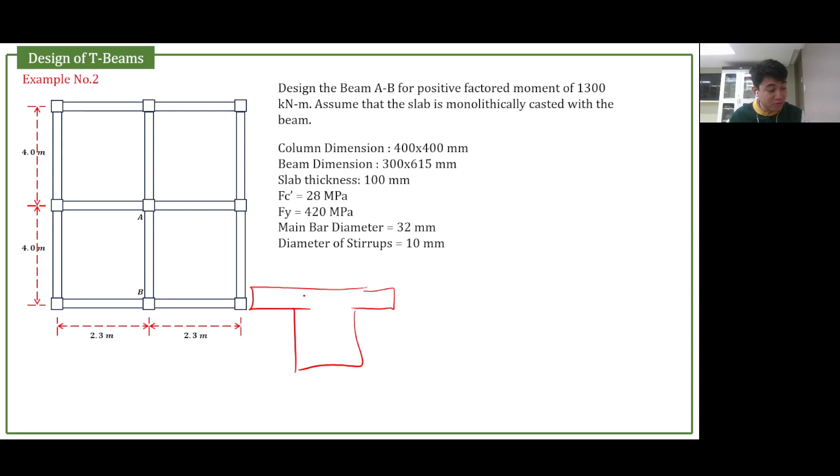So for this example, we have to design beam AB for positive moment. For positive bending moment, we have to account for the effect of the flange, because for negative moment, the tension is at the top part. So the tension, for negative moment, is at the top portion, and therefore this area will be neglected. So no need to design it as a T-beam.

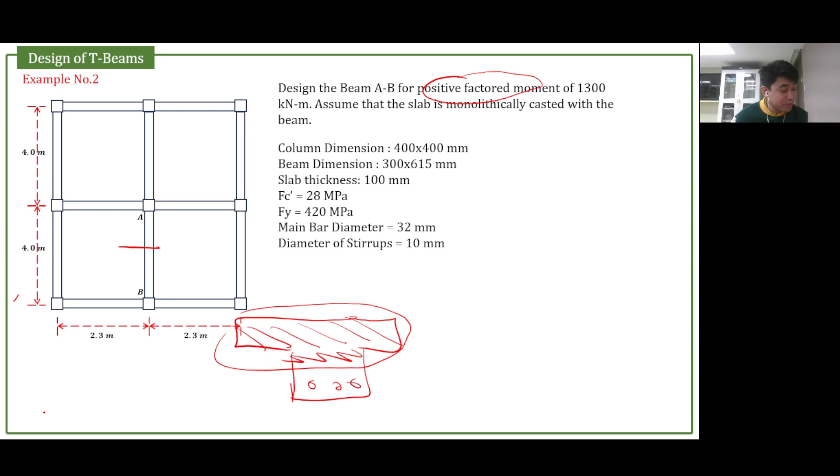Okay, so we have to complete that later, the base flange. For now, let's analyze what are the necessary parts of this beam.

The column dimension is given as 400 millimeters by 400 millimeters. The beam dimension is also given as 300 by 615 millimeters. The slab thickness is 100 millimeters, and Fc prime, Fy, the main bar, and the stirrup are also given.

The distances given are center to center of the columns, and the beams are aligned on the center line of the columns also. Okay, so let's solve.

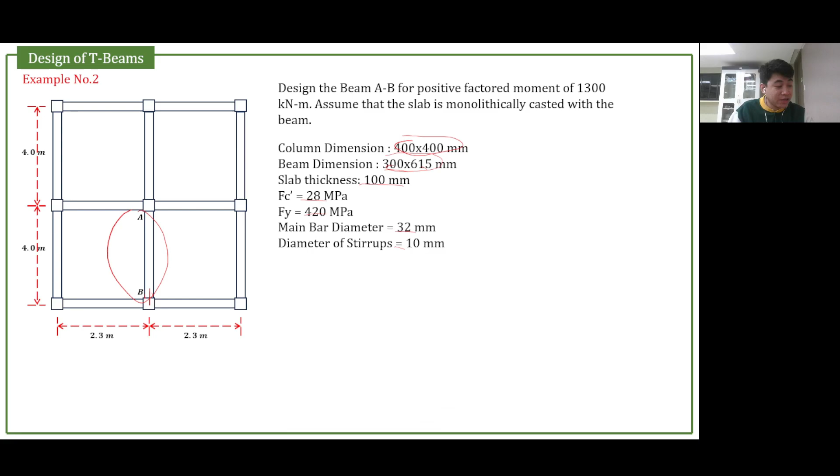So we are going to design for 1,300 kilonewton-meter of moment. First, we have to solve the base flange, and to solve it, we need the dimension of our beam here.

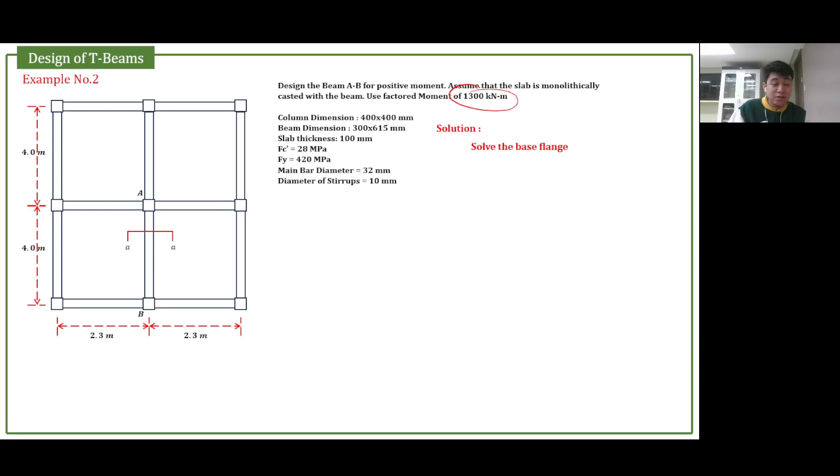So let's start by analyzing positive bending. Of course, the steel bars are at the bottom, and the compression is at the top part. Now the thickness of the slab is given as 100 millimeters.

The base beam web width is 300. And the effective depth is not yet the dimension of the beam, which is 615.

Now to get the effective depth, given the stirrup diameter and the main bar, the concrete cover is not given. If the concrete cover is not given, use 40 millimeters. So to compute the effective depth, we have 615 minus concrete cover, minus stirrup, minus half the diameter of the bar, which is 16. So we have 549.

So we have the effective depth.

Next, the base flange - how do we calculate it? We need the setup. This is the center. We have an interior beam, so this will be our equations.

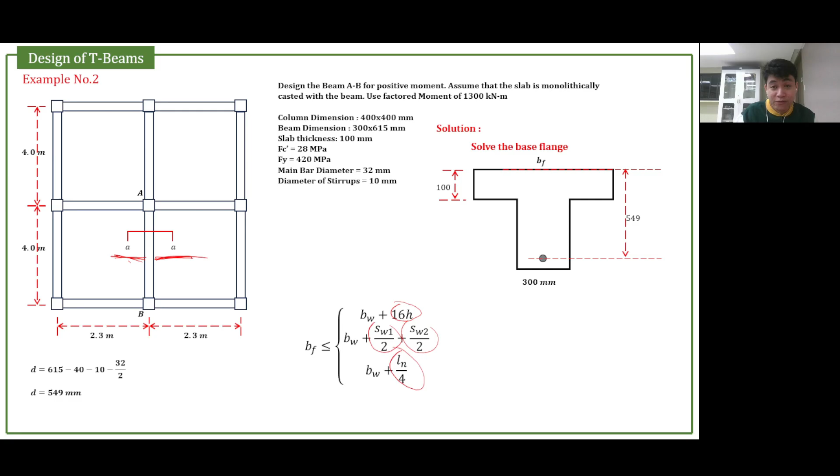So to get the base flange at each side of the web - each side, not just one side, we have two sides here. We have 16H, because it's 8H plus 8H. Then SW and SW, that's the other side. We have ln over 4, because it's ln over 8 plus ln over 8. So this is the provision we used, for each side of the web.

Going back, now let's calculate the important values such as the SW, and of course we have the thickness of the slab.

We have BW plus 16 times the thickness of the slab, that's 1,900. How about SW?

SW plus SW is the clear spacing of the beam. Since we are designing this, we have to get this done, which is 2.3 meters, center line to center line beam spacing. Now we have to reduce half of the dimension of the beam here, and then half of the dimension of the beam there.

So from 2.3 minus 150 minus 150, that is 2,000. It's the same here too, since it's also the center to center spacing of the beam. So we have 2,000 millimeters. Now you have the value of SW, 2,000, that is 2,000 over 2, so that is the total length of the base flange.

2,300. Next, LN - take note, plus LN is the clear span of the beam, not center line to center line. Maybe you'd use 4,000, but no - it should be the clear span, just from face of the column to the other face of the column.

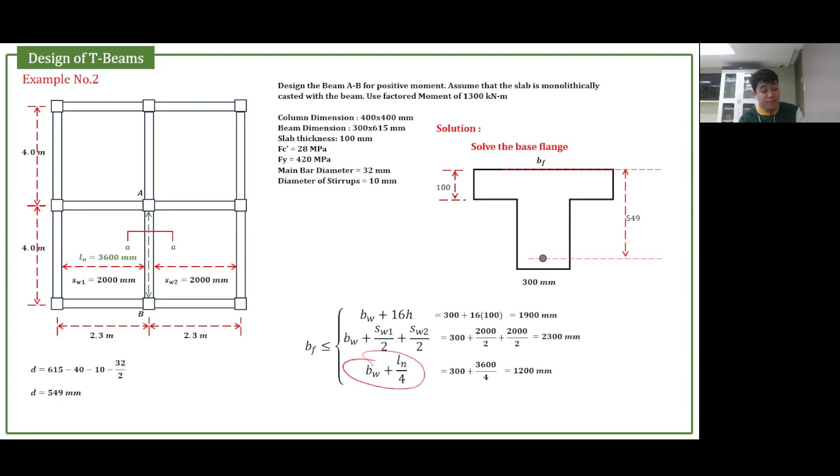1,200. So in parentheses, select at least - meaning the minimum value, or the lowest value among the three. So you have to select...

1,200. How do we design? So we'll just go back to the stress-strain diagram.

And of course, yun din kasi, di ba pag nagde-design tayo, we always want it to yield. Okay, so, this is the depth of compression block, this is the compression force. Okay, so, the stress times the area. Depth of compression block times the base flange. Yung governing values times the value kanina, yung 1,200 millimeters. And then we have the tension, which is As fy.

Now, you have to get the distance between these two forces. So that is d minus a over 2. And it will generate a nominal moment, and we multiply it to reduction factor. Diba pag nagde-design tayo, the given is Mu. Now, as per NSCP, the capacity is greater than or equal to the ultimate moment. For the design, we just equate this. Equal na lang sila. So, ano ba natin kinukuha? Yung capacity nito. It's either tension or compression.

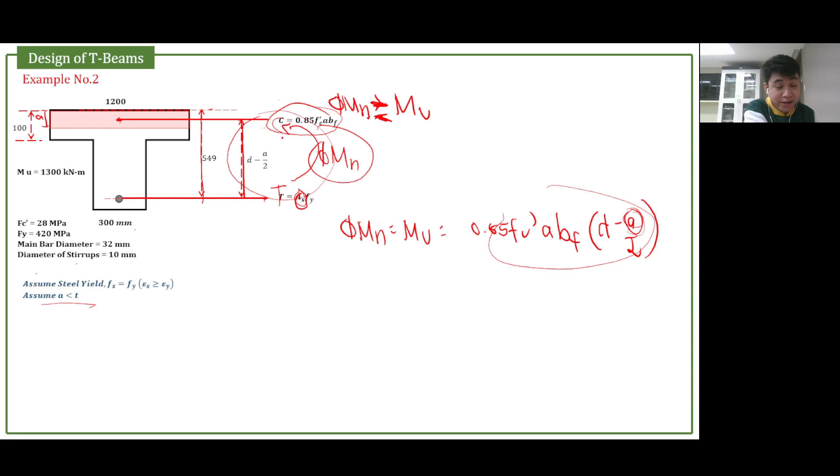But hindi lang ganun yung class, no? Pag nakuha sa a, if your a is less than t, your assumption is correct. However, class, if a is not less than t, pag greater than siya class, ano yung ginawa natin? Stress diagram. You have the tension and compression forces. We have to increase the depth of compression block. Increase natin ito, guys. And then recalculate the moment. So, let's try kung kakayanin ba nito.

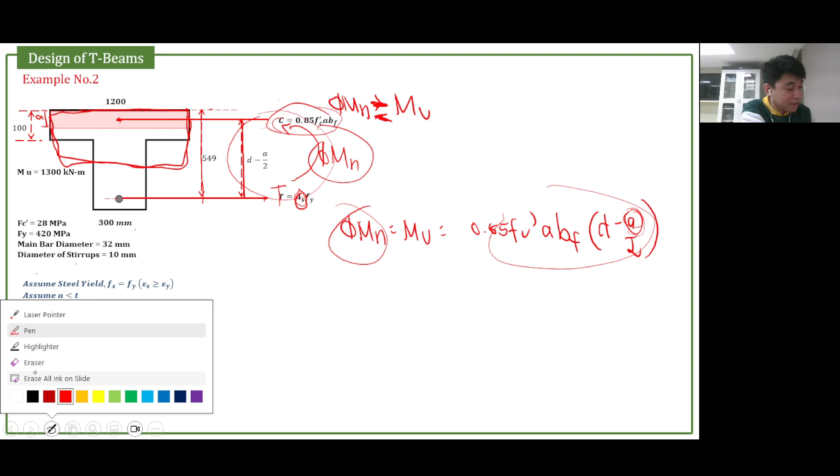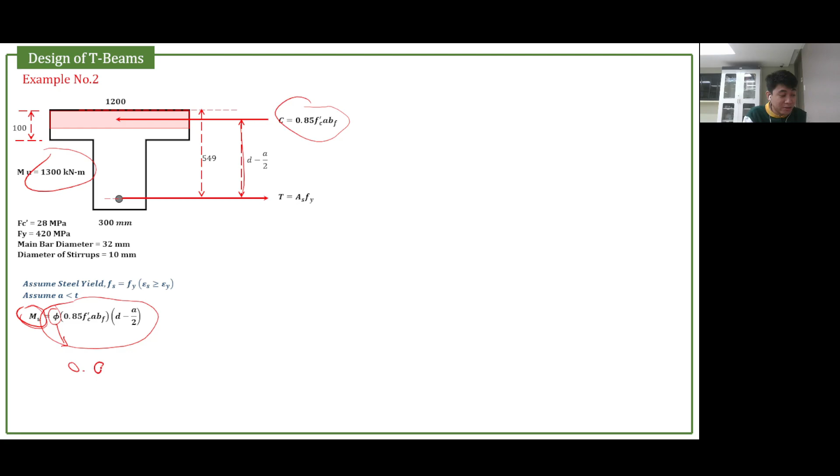Moment is equal to reduction factor times the force times the distance and we equate this to the given factored moment of 1,300, because the capacity must be equal lang dapat sa moment. Now, since we are designing, of course, we want it to be in tension controlled section. That's why the reduction factor must be 0.9.

Checking the value of a dito, 1,300 times 10 raised to 6 equals the reduction factor for tension controlled section, times 0.85 fc' times 28, a is unknown, b flange, 549 minus a over 2. With that, you can now get the value of a. The value of a is 101.508 millimeters. And that is greater than t. I-assume dito, a is less than t. So, mali ang ating assumption.

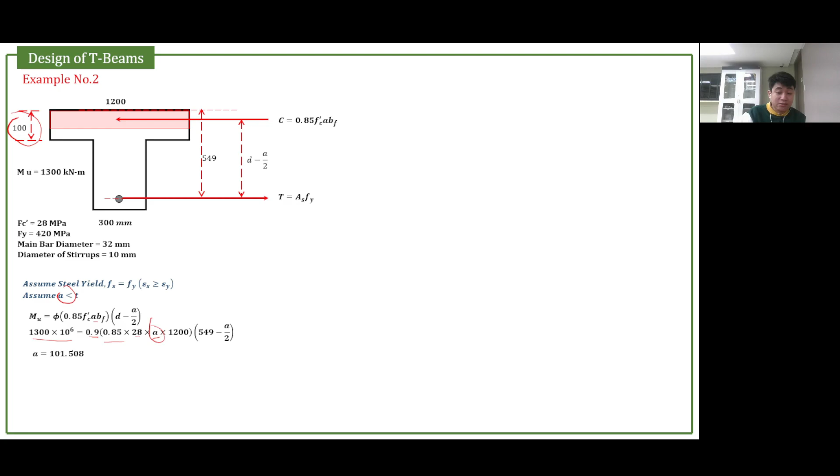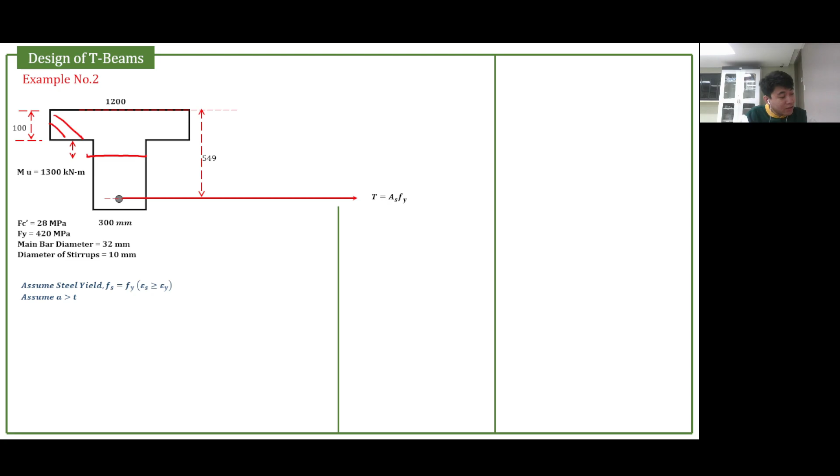So, what's next? Assumption is wrong dito, class. We add to a yung depth of compression block. Hanggang dito na yung nagiging compression block, somewhere here. Just like analysis if the assumption is incorrect. Pero dito class may moment na, so we equate. Instead na mag-start ka sa C is equal to T, mag-start ka sa moment. Then, yung dulo natin dito yung C is equal to T, kasi tsaka lang natin makukuha yung As.

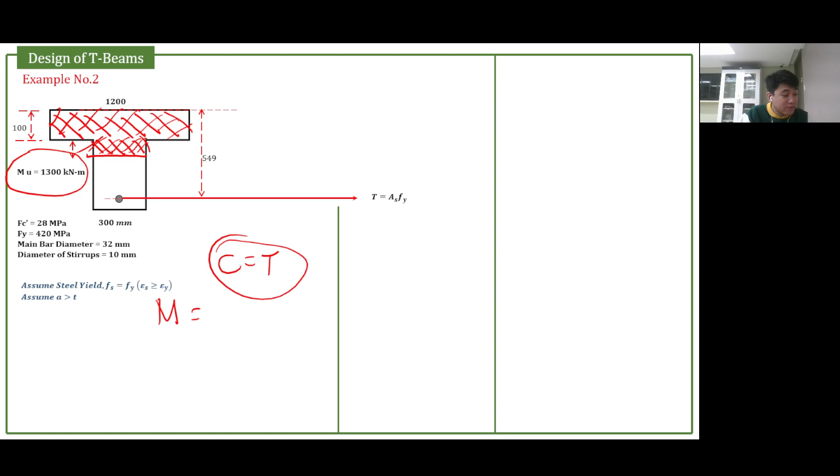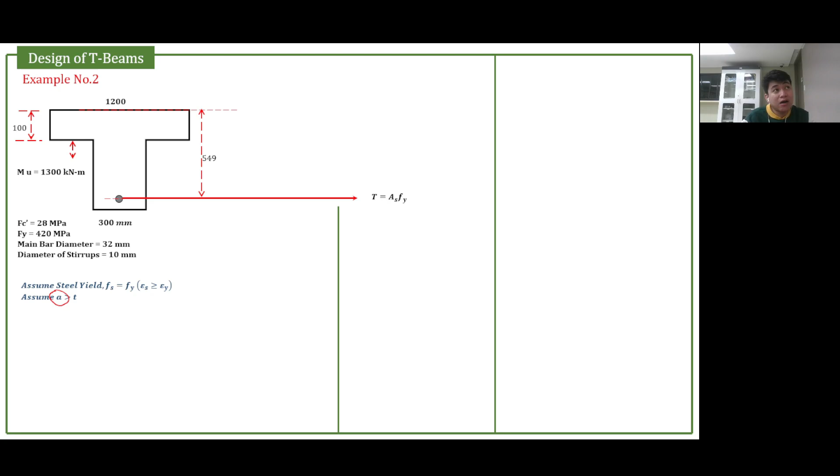So, we assume this is compression. We assume that a is greater than t. So, just like what we did in the lecture, we divide the compression block into two areas, so that we have two compression forces. Una, kunin mo yung centroid nito, ibigay yung unang compression force natin: stress times the area. Next, dito naman, kunin mo yung centroid niyan. Yung height niyan class is a minus t, kasi ito ay a, depth of compression block. So, we have the stress times the area.

So ngayon, since we need the moment, hindi mo pwedeng i-moment yung T. Unang-una, hindi mo alam yung centroid ng compression. Pangalawa, wala kang As, wala ka ring a. So, dalawa yung unknown. Maganda, yung compression. Pag design class, yung compression yung i-moment natin. So, alamin natin yung centroid. Paano natin i-moment yan kung wala tayong distance ng mga forces. Unahin na muna natin yan class.

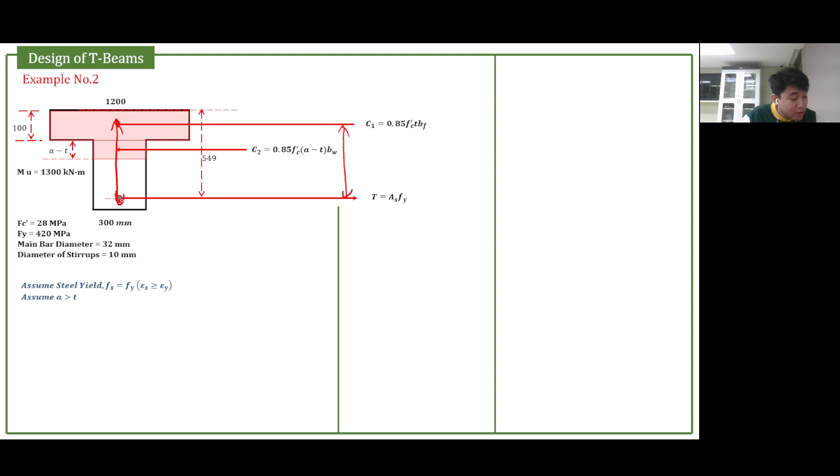Alam natin yung centroid niyan, sa gitna ng t. How do we calculate this distance going to the centroid of the rebar? From the top, we have d. So, d minus t over 2. Next, what will be its distance? That will be d, bawasan ng t, bawasan ng kalahati ng a minus t. So, yun yung distance dito.

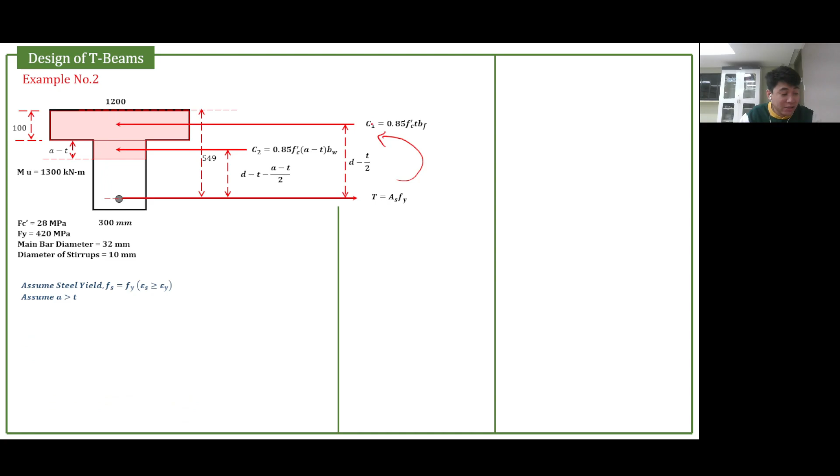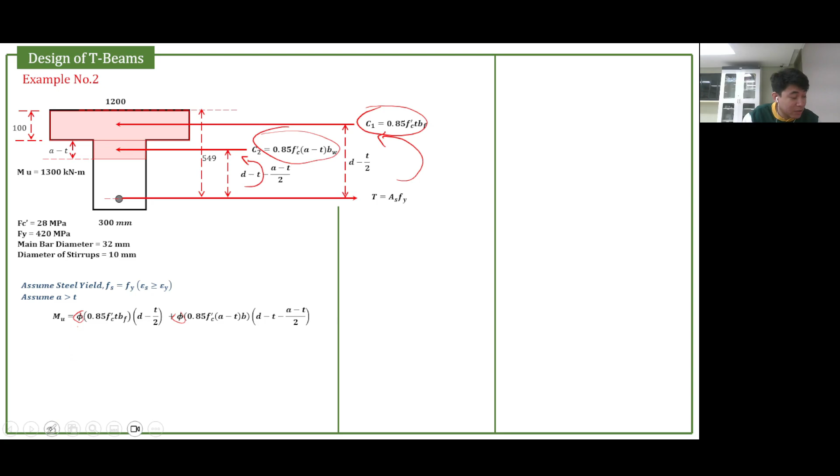Now, to calculate the moment, dalawa yan, moment na ginagawa ng C1 and moment na ginagawa ng C2. Nalagyan na rin natin ng reduction factor, and we assume this is yielding and we want it to be in tension controlled section so that the reduction factor will be 0.9. Okay. So, let's solve.

Again, this is compression 1 and this is compression 2. That is equal to moment capacity. We will equate it to the given factored moment, 1,300 kilonewton meter. So, reduction factor 0.9. Substitute natin, 0.85 f'c times thickness ng flange or slab, b flange, D, 549 minus T over 2.

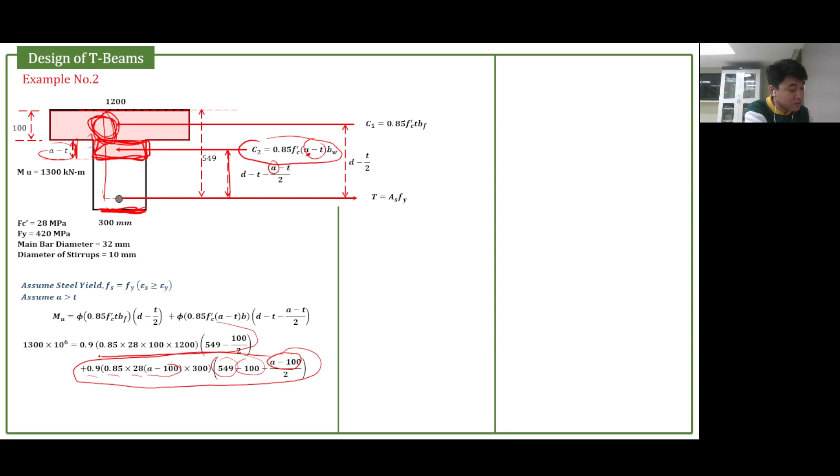So, ang technique, solve mo muna sa calc, then solve si A. So, with that, masasolve mo si A. And it should be greater than T, kasi yun yung assumption natin kanina. So, the answer is yes, greater than T siya, 106.061 millimeters. So, assumption is correct. Meron ka ng A, which is kailangan mo dito. So, pag nag-sum of forces ka, C1 plus C2 is equal to As fy.

Okay, now, but before you proceed, last time, nung design natin ng SRB, meron tayong limit of reinforcement to check, rho max. Yung rho max, if you can recall, is 3/7 times 0.85 f'c beta over fy times dt over d. So, saan galing tong 3/7? Galing siya sa strain. Now, we're going to redraw the strain diagram. Galing siya sa strain para hindi mag-exceed sa 0.004. So, ito yung minimum strain natin. Kasi pag lumiit pa yung strain dyan, hindi na ina-allow ni code. That is the minimum strain, which is equivalent to maximum steel ratio.

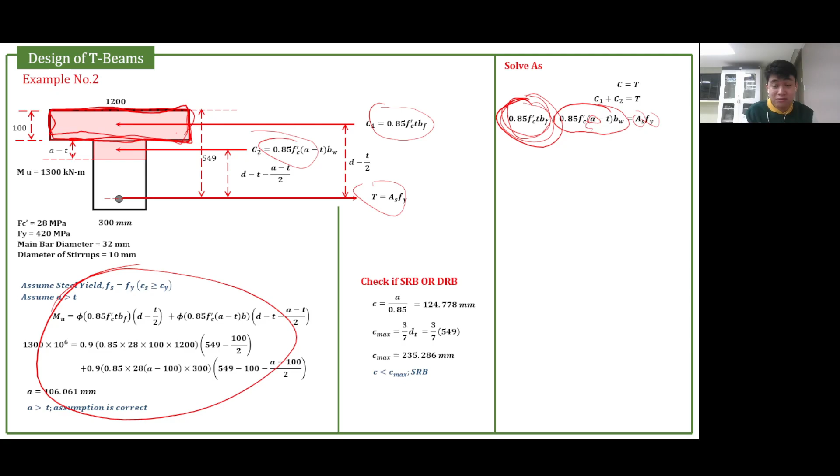Kahit di ka pa nag-try, may value ka na yun. Kasi this is the total force on this entire flange. Ito class, ito yung naka-base sa A. Equal to AS Fy, yield to. SRB, automatic mag-yield to, kasi nasa tension-controlled section mo, di ba? Okay.

So solve natin yung AS, substitute na to. This one, may A ka na. And then you can solve the value. Medyo mahaba nga lang, class, but I suggest you solve this first. Mas mabilis naman siguro to compared sa analysis na sobrang haba. Parang ito yung sinubstitute natin sa analysis, yung dulo natin part, yung moment. C is equal to T. Baliktad siya, kasi AS yung gusto natin makuha dito. So for the AS, from C is equal to T lang siya.

So now, let's compute the minimum steel area. We're not going to solve the rho, hindi naman steel ratio yung nakuha natin initially, A. Tapos we get the area. So compare na lang natin siya sa minimum steel area. You don't need to compare this to AS max, kasi you just need that to identify if it is singly or doubly. Since kanina nalaman mo na singly from C, no need for AS max. AS max was derived from 0.004. So minimum na lang ang kailangan natin.

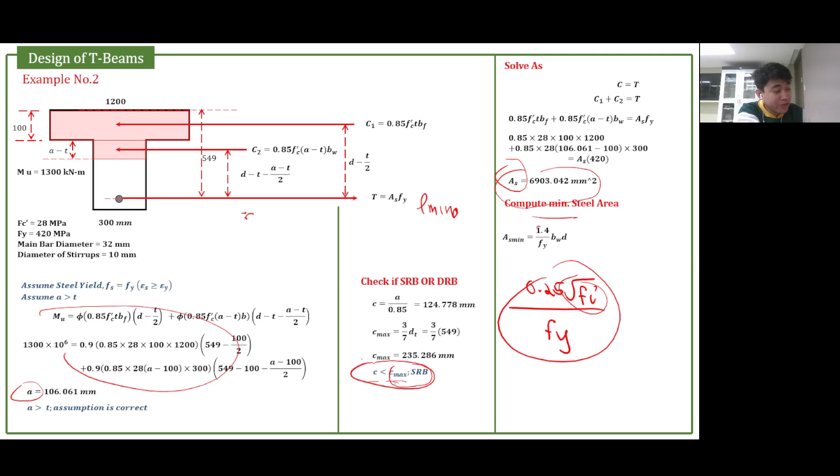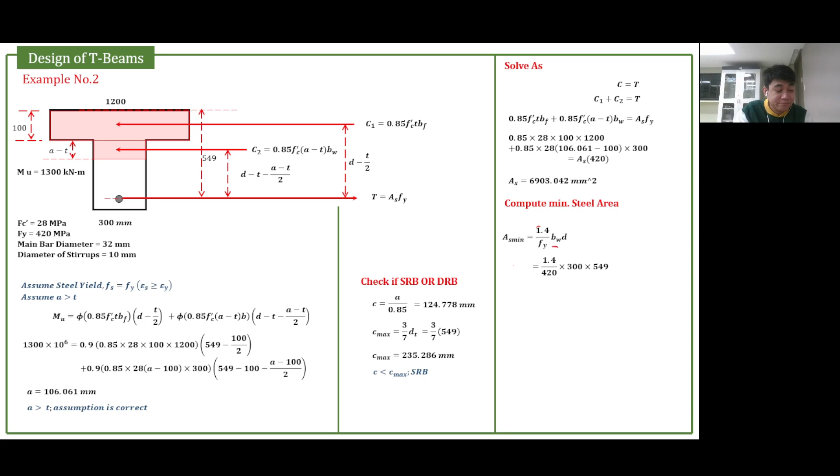From the NSCP, we have two formulas for minimum steel area: 0.25 times root of FC prime over Fy, pero nag-govern lang ito kapag FC prime mo is more than 32 megapascal. So 1.4 over Fy times BW, beam web, and the effective depth. Substitute: 1.4 over Fy, BW times effective depth. The AS minimum is 549. Compare this here; this is larger. We select the larger value, so this one governs.

We are now using that to calculate the number of bars: AS over area of the individual bar. We are using 32 millimeter diameter bars. The answer here is 8.5. Round up lagi tayo, so 9. That is your final answer.

So that is just how you design SRB. From C equals T, galing lang dito lahat. First, solve the A, then the capacity, equate sa given factored moment. Check kung SRB or DRB, then pwede ka na mag-C equal to T with AS Fy, then kunin yung minimum area to make sure na AS mo is greater than the minimum, baka sobrang liit ng moment. So that's it for the design and analysis of SRB.